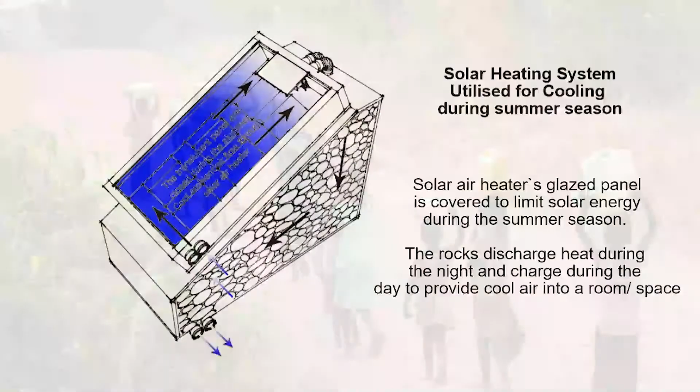The research document is based on the design of a low-tech solar heating system for residential use in Climate Zone 2 of South Africa. The outcomes and potential of the main study, conducted during the winter and summer season in July, August, and September 2021, will be discussed. The experiment is divided into two sections: solar heating during the winter season and ambient cooling during the summer season. Each section has two parts: enclosed ventilated heating and enclosed ventilated cooling.

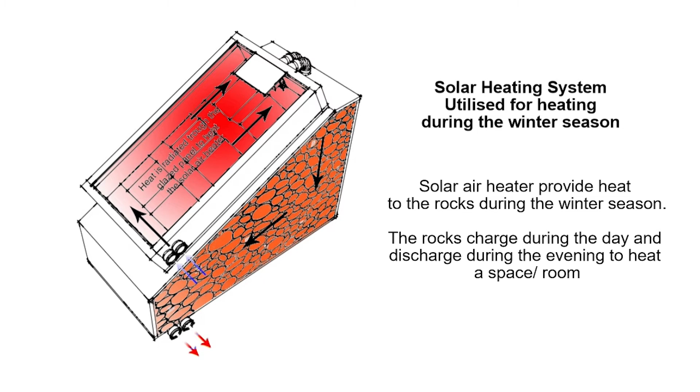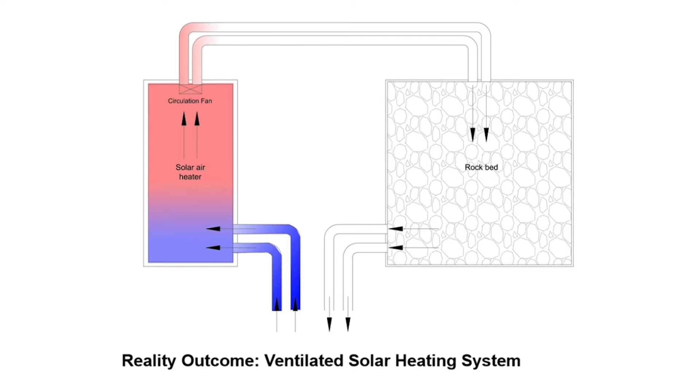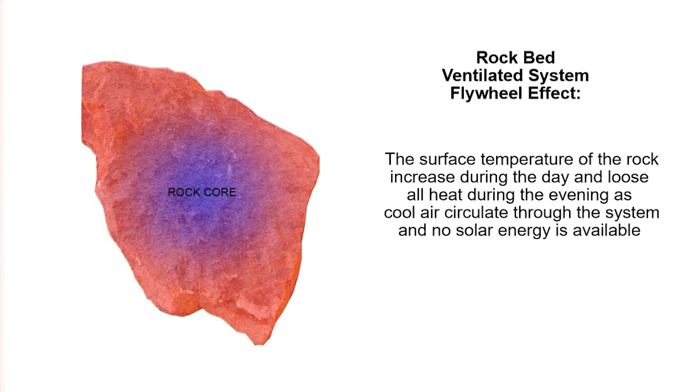The ventilated heating system allows fresh ambient air to circulate through the system at all times. The ambient air circulated through the solar air heater reached a maximum of 43 degrees Celsius, which circulated through the rockbed heat collector. The results after the 7-day experiment indicated that the surface of the rocks was charged with heat during the day. However, as soon as no solar energy was available, the ambient air cooled the surface of the rocks, and no solar energy was stored to use during the evening.

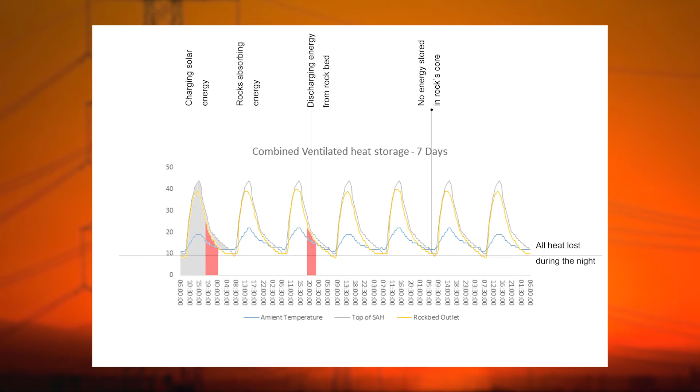The heating system was changed based on the results to prevent ambient air from entering the system, and an experiment was conducted on an enclosed heating system. The enclosed heating system does not allow any fresh air through the system. It recirculates and reheats the solar air heater's heated air in the system. The air which was circulated through the system reached a maximum of 79 degrees Celsius.

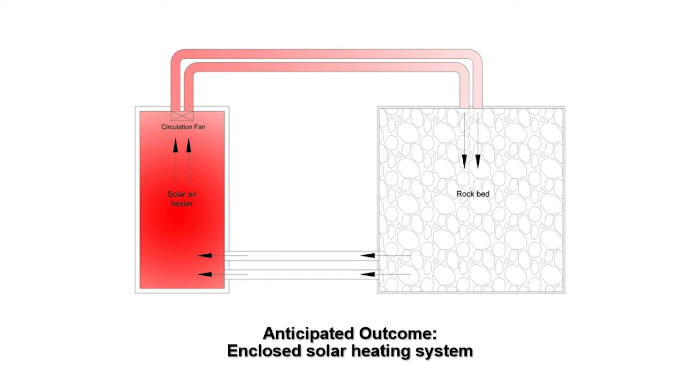The anticipated outcome for the solar heating system is for the solar air heater to capture the solar energy and ventilate hot air through the rockbed heat collector. The solar energy will charge the rocks during the day and discharge heat during the evening. However, this was not the outcome.

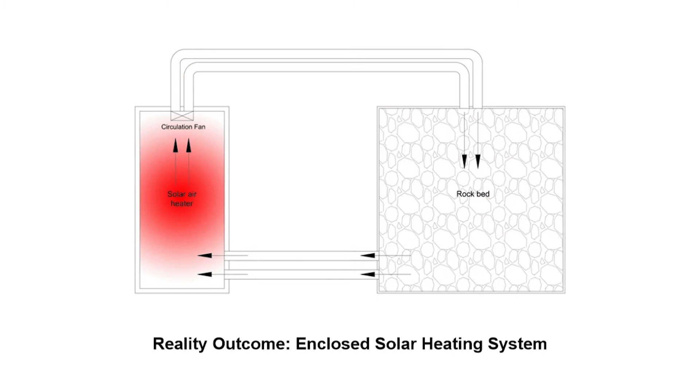The initial results indicated that the system does not provide hot air at the outlet of the rock bed during the evening as anticipated. This led to further investigation of the results, and it was found that the energy must discharge somewhere else. When looking at the 7-day results of the enclosed system, it is noticed that the lowest temperature of the rockbed outlet increased each day.

This is a result of the surface heat being discharged to the core of the rock, as the core of the rock is colder than the rock's surface and absorbs the heat. The core temperature will increase incrementally each day and discharge as soon as it reaches capacity. This is called the flywheel effect, where the thermal mass such as concrete, rock or water stores heat and discharges as soon as the thermal mass reaches capacity.

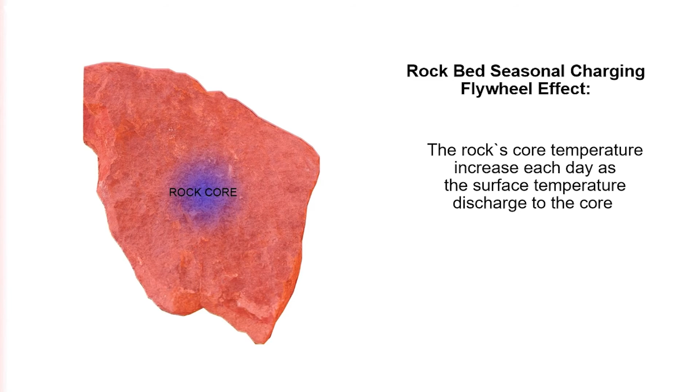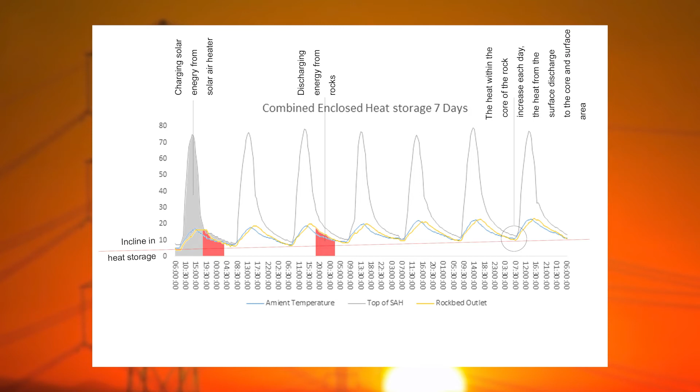The experiment was done over 7 days and showed the potential for seasonal charging. Seasonal charging will require the system to charge during the summer to reach capacity and maintain heat during the winter. During the heating experiment, the potential to use the heating system for cooling during the summer was recognized, as the system will be redundant for approximately 7 to 8 months.

During the cooling experiment, the solar air heater panel is covered to limit the solar exposure and use the ambient air during the night to discharge the rocks. The enclosed and ventilated cooling experiment was conducted over 3 days during the summer season in September 2021. The ventilated cooling system recirculated 50% of the air through the system and 50% fresh ambient air.

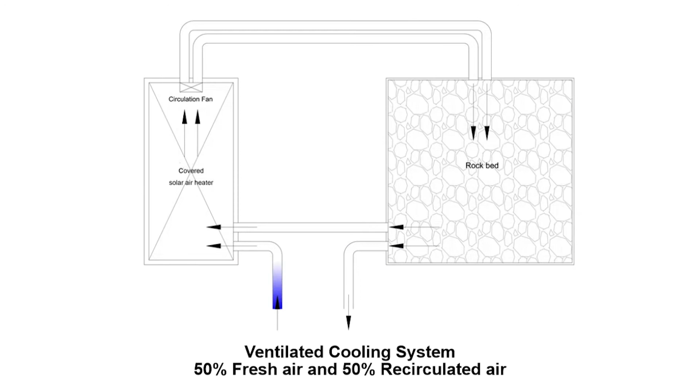The system recirculates the air by connecting one of the solar air heater's inlets with one of the rock bed's outlets. The remainder of the solar air heater's inlet and the outlet of the rock bed remain open to circulate fresh air. The system was running for 24 hours per day without any intervention.

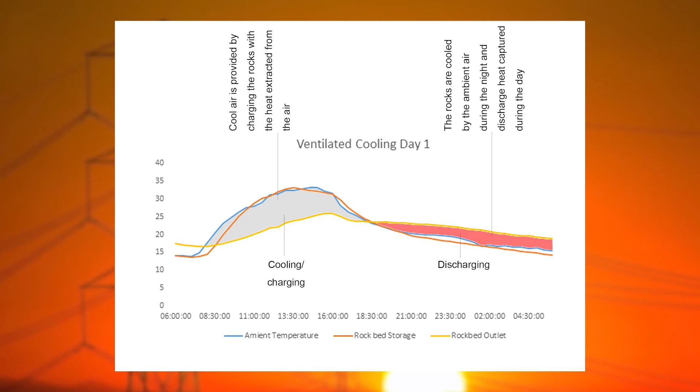The result from the experiment proved to provide cool air at an average of 28% lower than the ambient air at the peak temperature during the day. The system provided cool air during the daytime. The rocks discharged during the evening and provided warmer air than the ambient air temperature.

The enclosed cooling system recirculates air through the system during the day. The control valve at the intake of the solar air heater and the outlet of the rock bed is open to allow fresh ambient air during the evening to discharge the rocks. The intake and the outlet of the system are closed during the day.

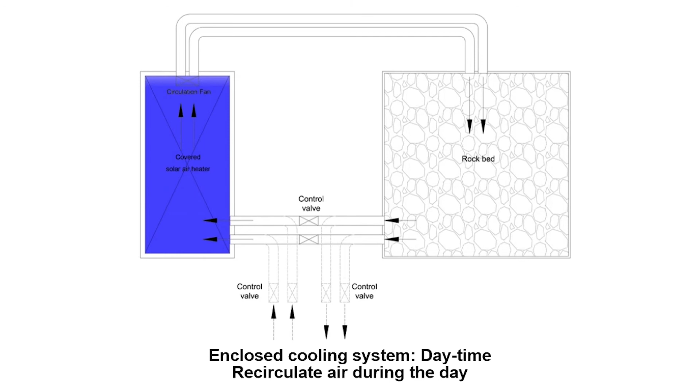The results from the experiments provided cool air at an average of 18% lower than the ambient air at peak temperature during the day. The system provided cool air during the daytime. The rocks discharged during the evening and provided warmer air than the ambient air temperature.

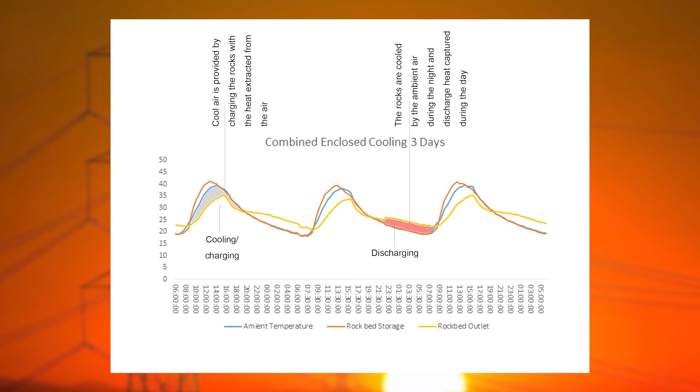The enclosed heating system performed better than the ventilated heating system. However, it did not provide fresh air as it is enclosed and will require seasonal charging to perform at its optimum. The ventilated cooling system performed better than the enclosed cooling system. The system also provided fresh air at the outlet of the rock bed and did not require any interventions.

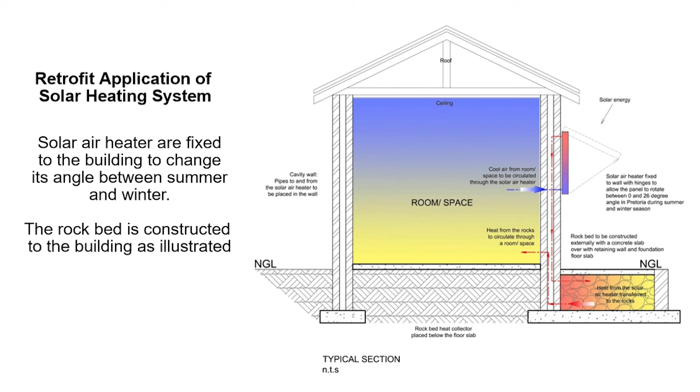All materials used to construct the solar heating system are from off-cut, redundant construction material or waste. The only items bought are the circulation fan and the solar panel. The solar heating system can be applied to existing and newly built buildings. When applying the solar air heater system to an existing building, the solar air heater can be fixed to the northern facade, with the rock bed constructed next to the building.

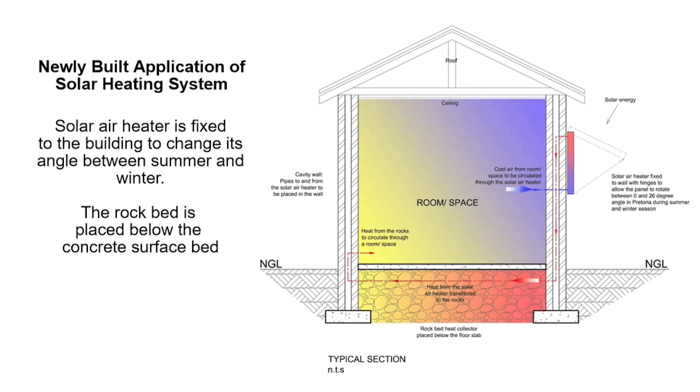When applying the solar air heating system to a newly built building, the solar air heater will be fixed to the northern facade, with the rock bed constructed underneath the floor slab. It is proposed that the solar air heater is fixed on a hinge to change its angle between summer and winter season. The system focuses on the thermal comfort of low-income communities and creates a new ecosystem within these communities.

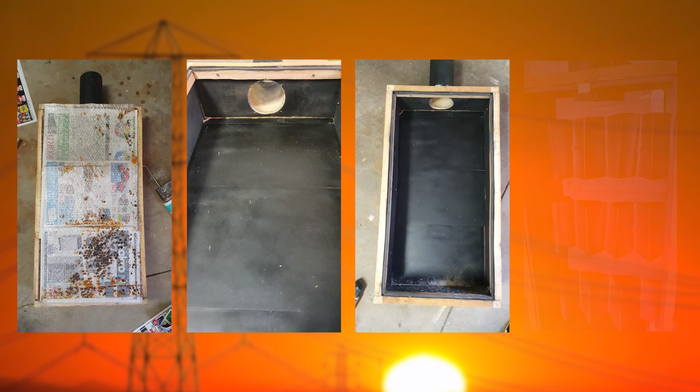The construction of the system will require the skills of a plumber, carpenter, and electrician. Therefore, it will create job opportunities for the construction and retail sectors. The procurement and selling of the materials required to construct the system will create a new ecosystem. It will create opportunities for collecting the material, sorting stations, and reselling the material for construction.